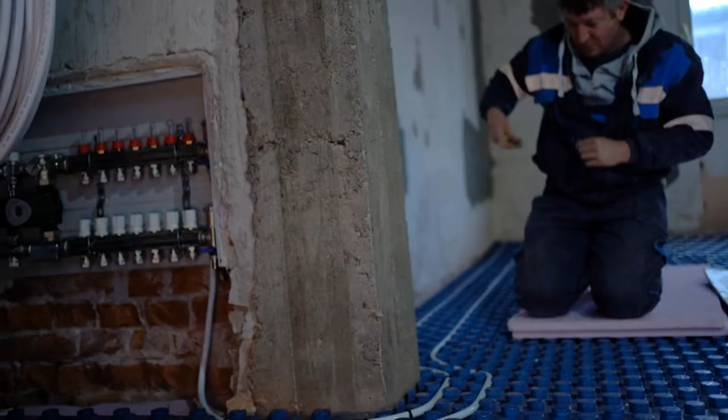Last January, my heating bill was $340 for 1 month in a house I own. I'm not complaining about the money. I'm complaining about the math. Because somewhere on the other side of the planet, 175 million people heated their homes that same winter. Not with gas, not with electricity, with sand and stone, and most of them paid nothing extra at all.

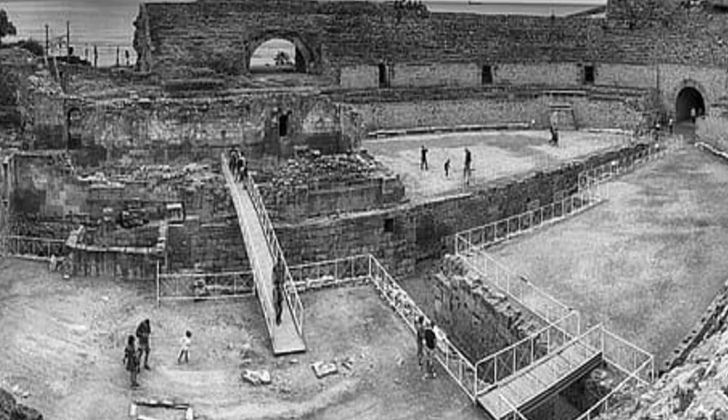Here's the part that really got me. This isn't new technology. It's not some Silicon Valley moonshot waiting on venture capital. The physics behind it was figured out before the Roman Empire fell. Civilizations from Korea to China to Scandinavia independently discovered the same truth, that if you heat a dense, cheap material and insulate it properly, it will hold that heat for days. No fuel, no bill, no moving parts.

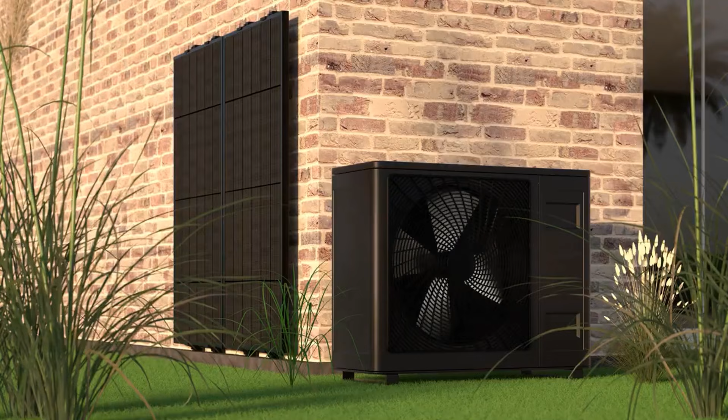So why is it that in 2025, you cannot legally install one of these systems in 49 American states? Not without a registered engineer, a $50,000 testing process, and the blessing of a committee stacked with gas industry representatives. That's exactly what we're going to unpack today. Stay with me, because this goes deeper than heating.

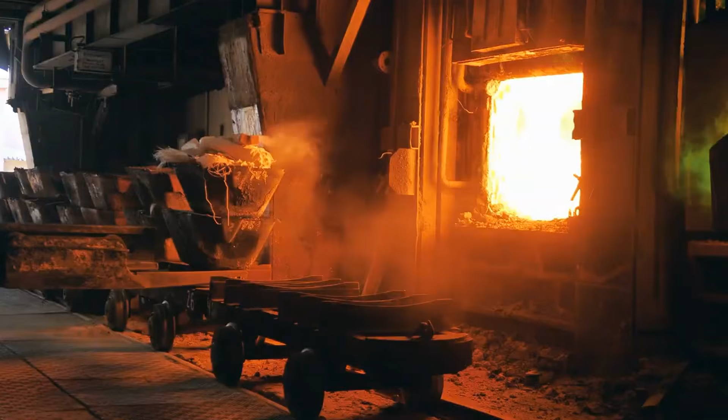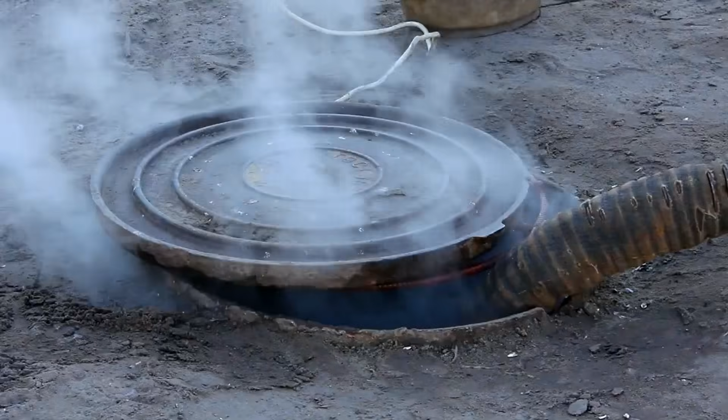Let's start with something your physics teacher probably glossed over. Thermal mass. Every material around you absorbs heat, but they don't all absorb it equally. And more importantly, they don't all release it at the same rate. Water heats up fast and cools down fast. Air is nearly useless. It holds almost nothing. But stone, brick, sand, dense, heavy, granular materials, they behave like a thermal flywheel.

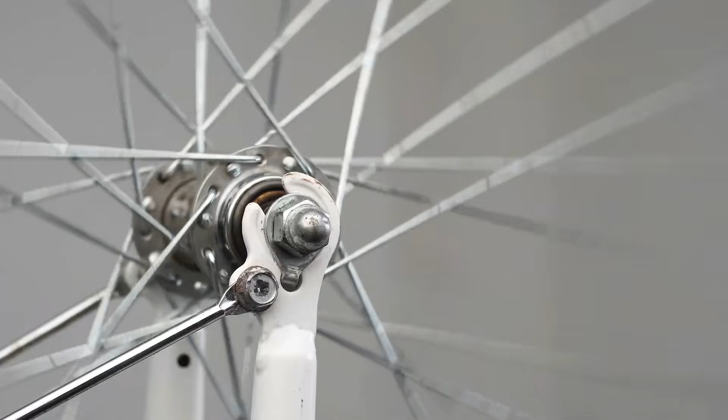Think of it like this. Imagine spinning a bicycle wheel. A lightweight wheel starts and stops quickly. A heavy flywheel takes effort to get spinning, but once it's moving, it keeps going for a long time on its own. Dense materials do the same thing with heat. You charge them up, and they release that energy slowly, steadily, for hours, sometimes days, afterward.

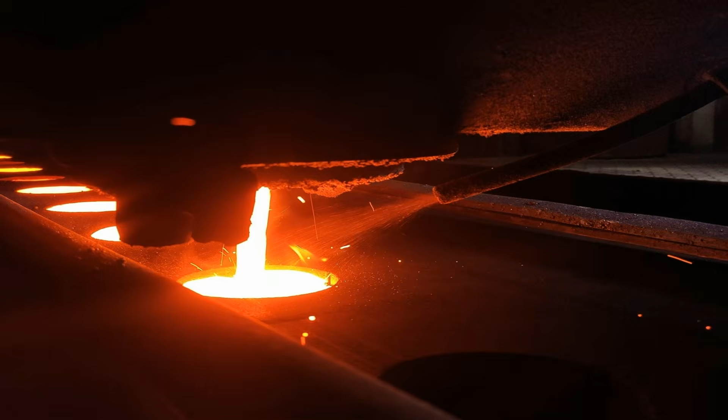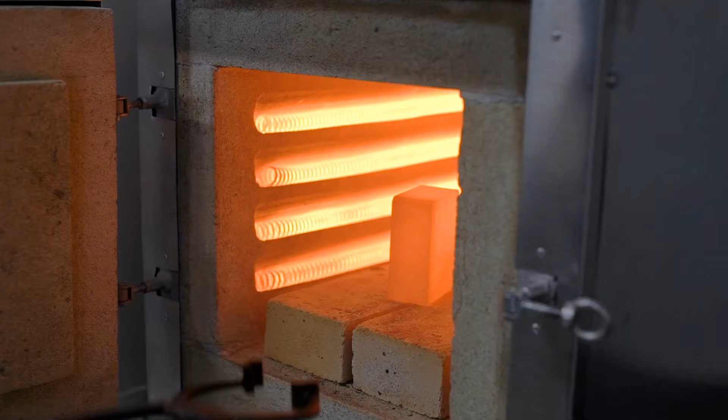Here's the specific physics that makes sand surprisingly powerful. Sand's thermal conductivity sits between 0.2 and 0.7 watts per meter Kelvin. That's extraordinarily low. Scientists at Finland's Polar Night Energy demonstrated that if you heat one side of a 1-meter block of sand to 500 degrees Celsius, it takes over 8 full days for that heat to reach the other side. 8 days, 1 meter. That's not a flaw. That's the feature. The same property that makes sand slow to release heat is the exact property that makes it hold heat so efficiently. The weakness and the strength are the same physics.

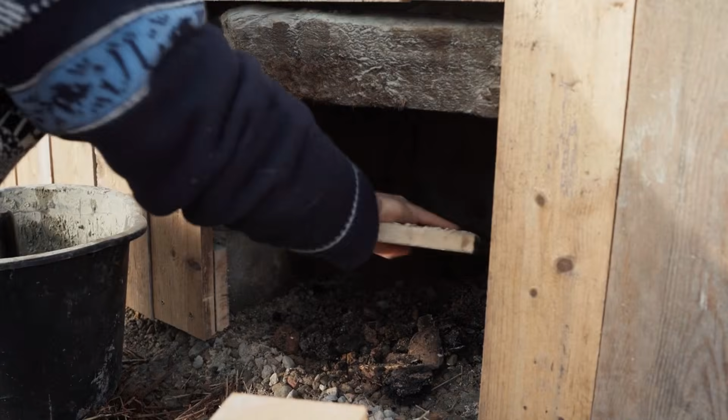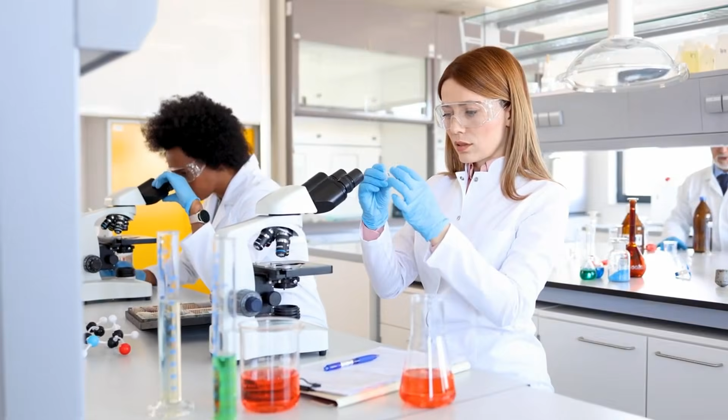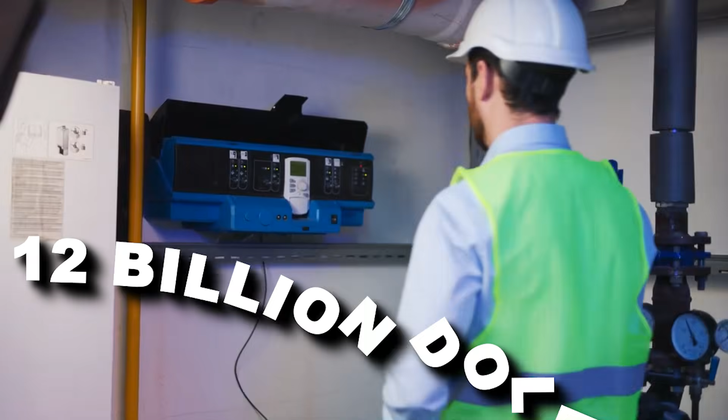And when the U.S. National Renewable Energy Laboratory tested silica sand heated to 1,200 degrees Celsius, held there for 500 continuous hours, they found zero degradation. No chemical change. No wear. The sand didn't age. A technology that doesn't degrade is a technology that doesn't need replacing. And that is a very inconvenient truth for a $12 billion industry built on selling you replacement equipment.

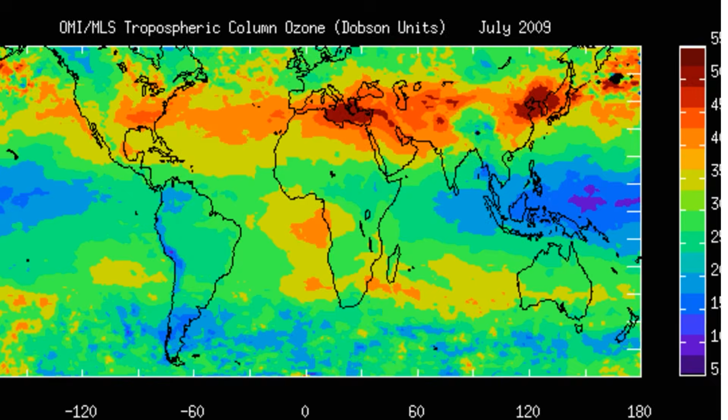Here's something that genuinely fascinates me about this story. Thermal mass heating wasn't invented once. It was invented independently by multiple civilizations, centuries apart, on different continents, because the physics is so obvious that anyone who built with stone eventually figured it out.

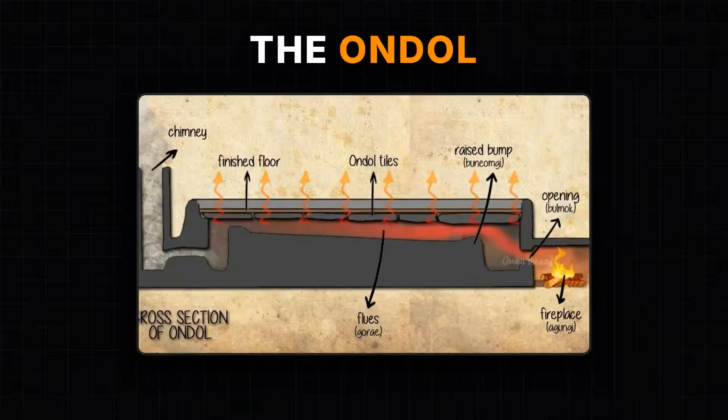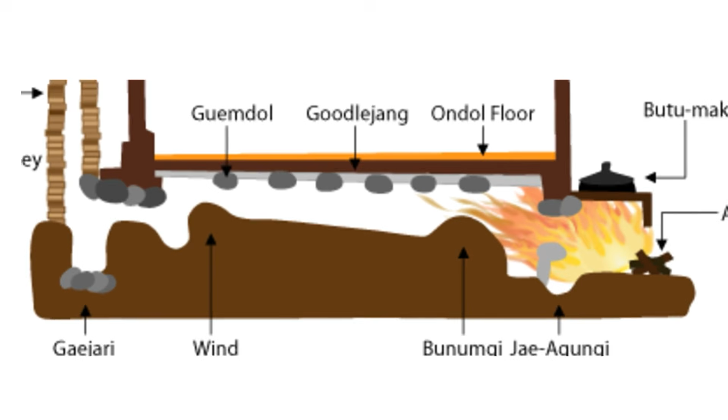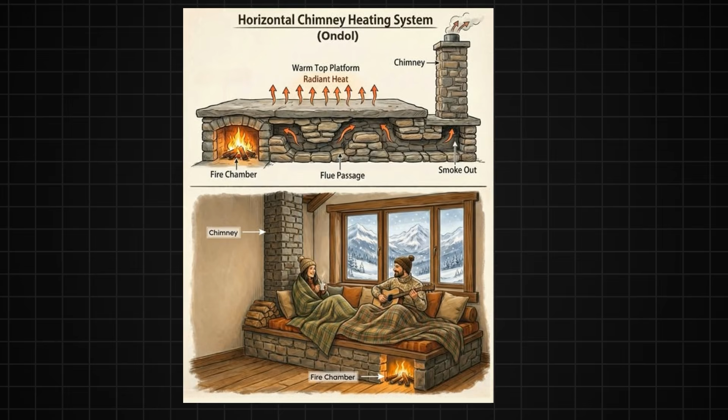On the Korean peninsula, roughly 3,000 years ago, a system called the ondol, meaning warm stone, became the foundation of home life. The design was elegant. Burn fuel in a firebox outside the living space. Channel the hot exhaust gases through stone passages beneath the floor. Let the thick stone slabs absorb that heat. The fire could go out at midnight. The floor would still be warm at sunrise.

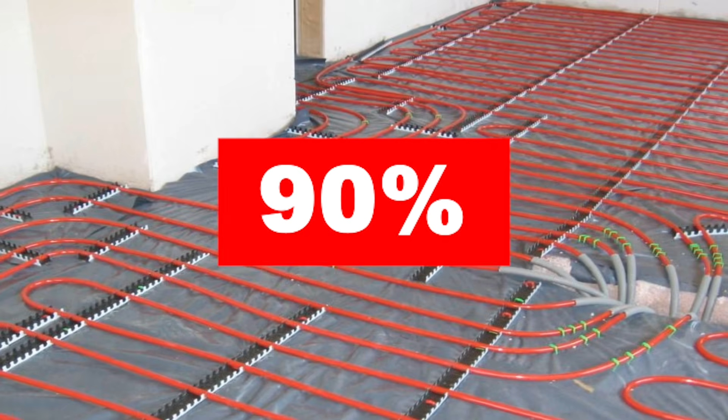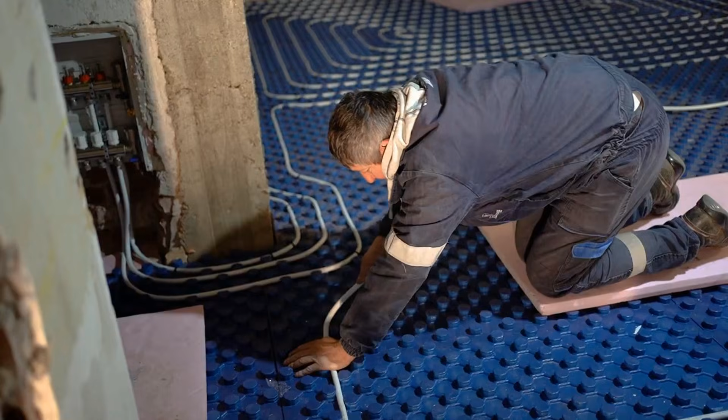By the 15th century, ondol wasn't a luxury. It was standard construction, built by the wealthy, built by the poor, built by everyone who intended to survive a Korean winter. Today, over 90% of South Korean homes use radiant floor heating that is a direct technological descendant of that same system. Frank Lloyd Wright, who encountered it while working in Japan in the 1910s, called it one of the most important architectural innovations he had ever seen.

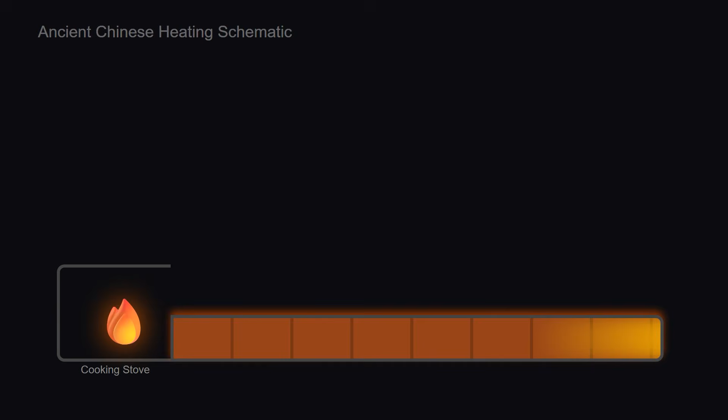In northern China, the same logic produced the Kang, a raised sleeping platform built from brick and masonry connected to the household cooking stove by a flue system. You cook dinner, and the combustion heat that would otherwise escape up a chimney instead flows beneath your sleeping platform, charging it up for the night. Researchers at Tongji University have proposed archaeological evidence pushing the Kang's origins back 7,000 years, though that remains debated.

What isn't debated? As recently as 2004, 67 million Kangs were actively serving 175 million people across 14 northern Chinese provinces. Studies found they reduced whole building heating loads by 50 to 80%. That's not ancient history. That's the early 2000s. That's within living memory. Then there's Scandinavia.

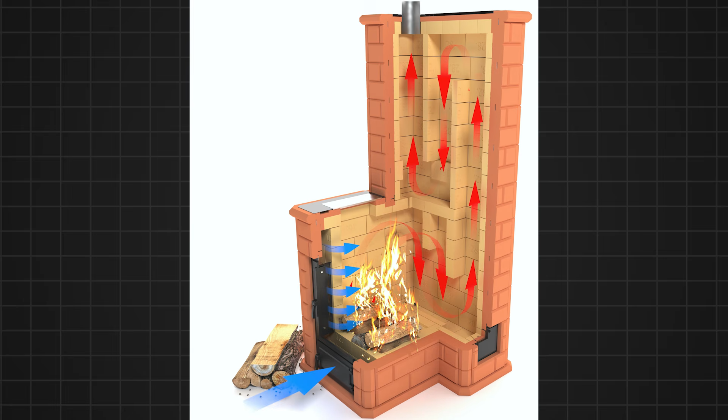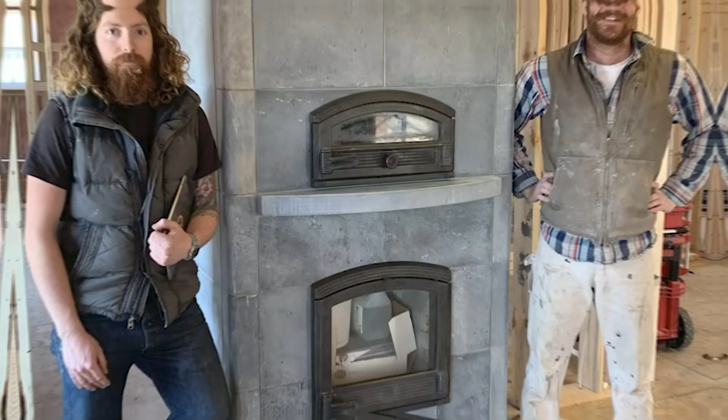The Finnish masonry heater takes a different form, a towering structure of dense soapstone, sometimes weighing 5 to 7 tons. You burn a hot, fast, 30-minute fire. The soapstone absorbs that surge of heat. Then, for the next 18 to 24 hours, it radiates warmth gently and evenly into the room. No cycling on and off. No cold spots at 3 in the morning. Just steady, radiant heat from stone that is already holding the energy.

Finnish company Tulikivi has been refining this design since 1980. Over 300,000 homes worldwide now use their masonry heaters. And when Finland's Polar Night Energy built their first commercial sand battery, they filled it with crushed soapstone sourced directly from Tulikivi. The lineage from a 15th century Finnish stove to a 21st century grid-scale storage installation is completely unbroken. The physics never changed. The insight never vanished.

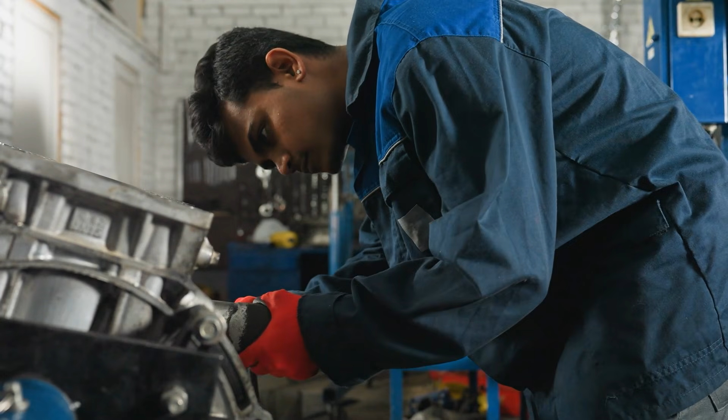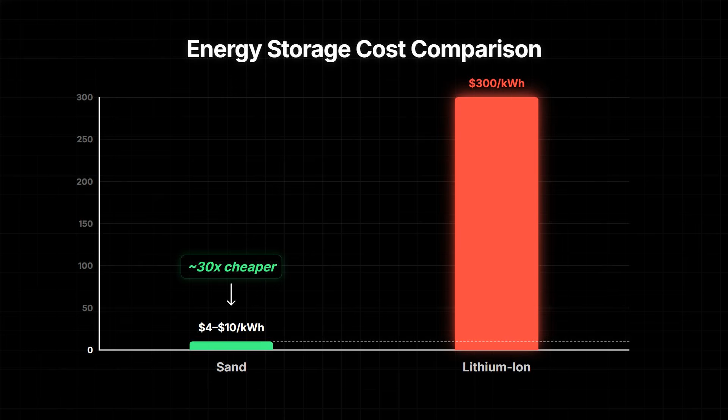In 2011, a mechanical engineer named Zhiwen Ma at the National Renewable Energy Laboratory started calculating storage costs for sand-based thermal systems. His team arrived at a number that made them recheck their math: $4 to $10 per kilowatt hour. For context, a home lithium-ion battery pack stores energy at roughly $300 per kilowatt hour. Sand is 30 times cheaper as a storage medium.

The raw material cost comparison is even more staggering. Sand runs about $16 per cubic meter. Lithium-ion cells cost approximately $39,600 per cubic meter equivalent. Craig Turchi, who manages the Thermal Energy Science Group at NREL, put it plainly. Once you've paid for the insulated vessel, adding more storage capacity is just adding more sand. It's almost too simple. Now here's something I want to address directly, because good content requires honesty.

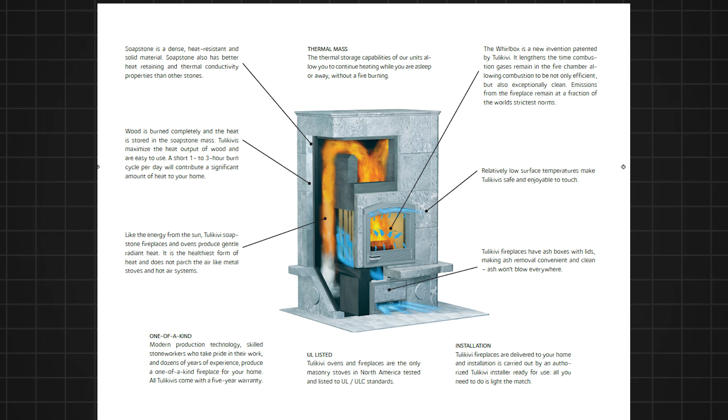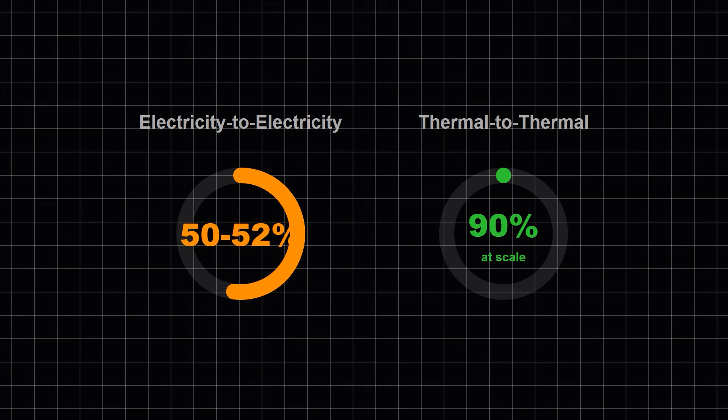A researcher at NREL named Jeffrey Gifford co-authored the key modeling paper on sand thermal storage. He was precise about the numbers. For electricity-to-electricity round-trip efficiency, sand thermal systems sit at around 50 to 52%. If you're storing solar electricity, converting it to heat, then converting it back to electricity, you lose about half. But here's the thing. Most homes don't need electricity back.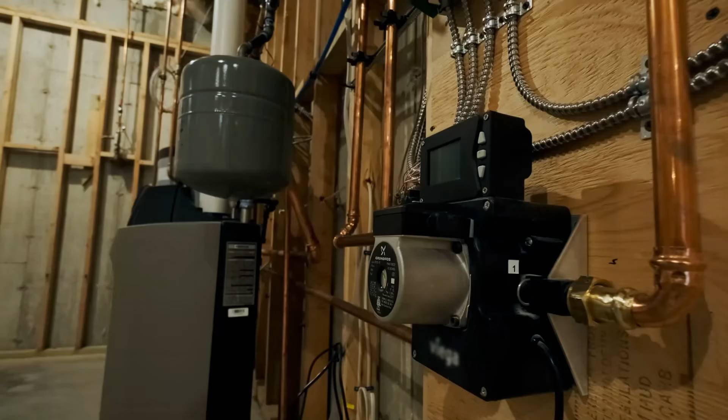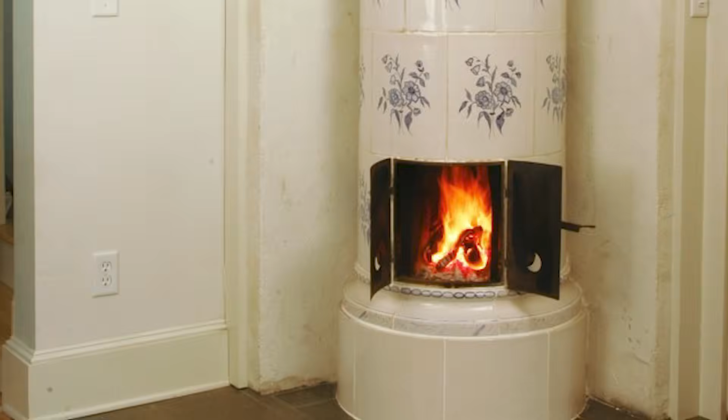They need heat. And in thermal-to-thermal efficiency, charging the sand with heat, extracting heat, the numbers jump to 75% for small systems and over 90% at scale. For a home heating application, that's the only number that matters. Finland's Polar Night Energy proved this at commercial scale. Their Pornainen installation holds 2,000 tons of crushed soapstone and 100 megawatt-hours of capacity. It operates at approximately $25 per kilowatt-hour of storage. 1/4 the price of lithium-ion, for a district that no longer burns oil.

So if the science is solid, the cost is dramatically lower, and billions of people have proven the concept across millennia, why can't an American homeowner legally build one? The answer isn't dramatic. It's bureaucratic. And bureaucracy, it turns out, can be just as effective as a conspiracy. The International Residential Code, adopted by 49 U.S. states, governs what you can legally build. It prescribes specific materials and methods. Anything outside that list must go through a variance process.

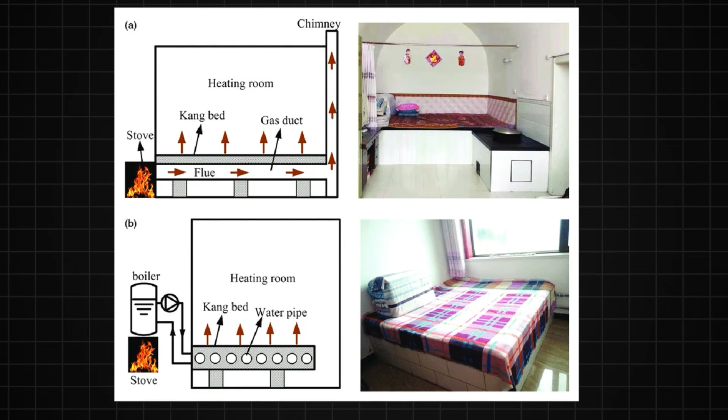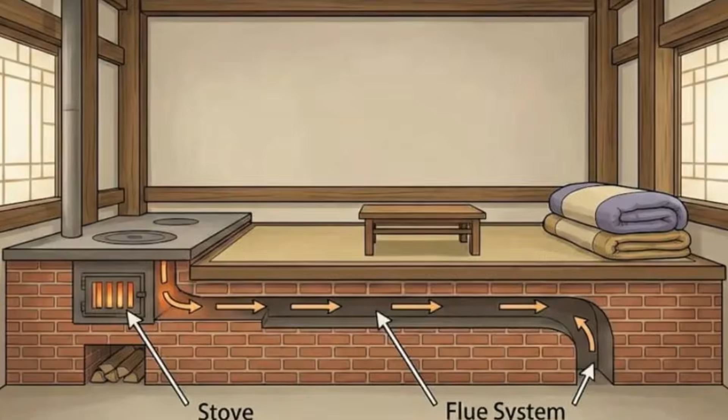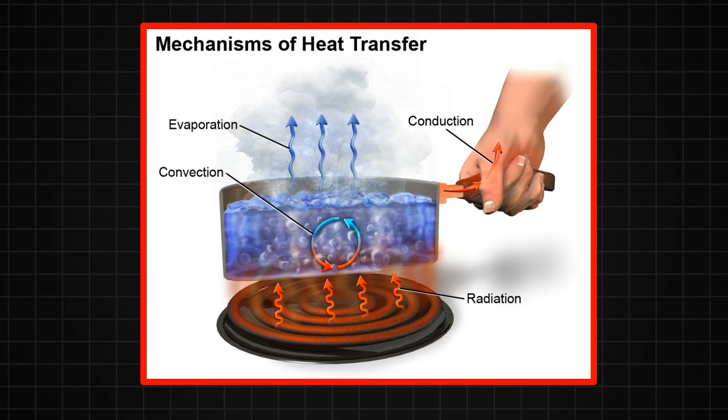That means a registered engineer's assessment, third-party testing through organizations like UL or ICCES, and approval from a building official who has likely never encountered your system before. That variance process costs between $12,000 and $60,000 for a system whose materials cost under $300. More specifically, no UL listing exists for any residential sand battery. No UL listing exists for any solid thermal mass heating device. No category. No pathway. You can't even begin the normal approval process because the regulatory category simply doesn't exist yet. The question isn't whether this works. The question is, what are you going to do with it?